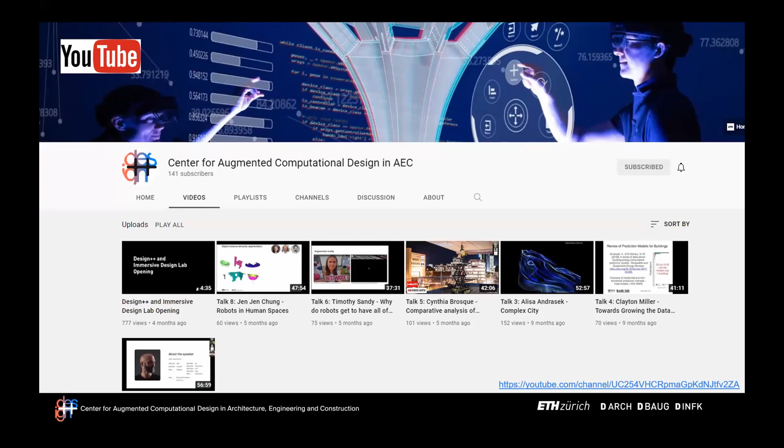At the moment, Design++ consists of a group of professorships from architecture, civil engineering, and computer sciences here at ETH Zurich. And for the running business, there is a team of 3 leading postdocs responsible for operating the immersive design lab, together with some research and teaching activities. A growing number of scientists and chairs and professorships is associated to us. So in case you're interested in the future of connecting AI, machine learning, and extended reality with the AEC industry, just reach out to us. We are more than happy to discuss further ideas or projects with you.

Having said that on the background of Design++ and the speaker series, now let me introduce to you our speakers of today, Professor Jens Schneider and Dr. Philipp Rosendahl, who are joining us from TU Darmstadt, as said before. I was informed that the third presenter, Mr. Costanzi, is unfortunately not available today. Professor Schneider currently holds the professorship for structural analysis, and since 2020, he is also Vice President for Industry Transfer and Internationalization at the Technical University of Darmstadt. Dr. Rosendahl is currently working as head of the Generative Design Lab at TU Darmstadt and is also co-founder of the startup company 2FI, which aims at improving skier safety in the backcountry for transferring scientific advances into practice.

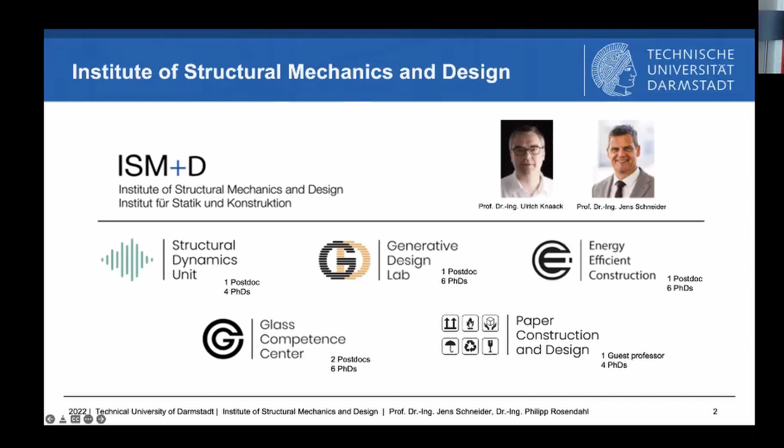And today, the most important group in today's talk, of course, is our Generative Design Lab. Philip is head of this Generative Design Lab, and we have other groups in structural dynamics, in energy efficient construction, in glass and in paper construction. And you see just from that slide that we have a little bit allocated the different topics to different postdocs and PhDs together with Uli Knaack, who is also part of the team, of course.

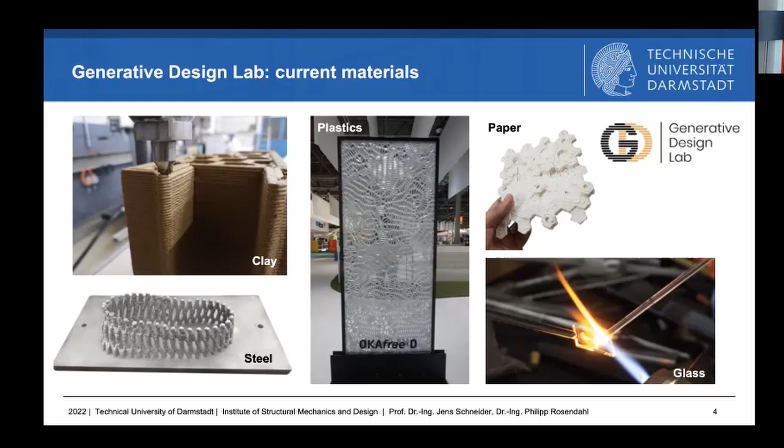Next slide, please. So we are working on clay, we are working on steel, we are working also on polymers or plastics in a certain context of the glass also, because glass always goes together with polymers in the end. And we are talking on paper and we are talking about glass. So in our group, like I explained before, we have dedicated the different groups a little bit to the topics I showed you.

We also prepared in the preparation of today's talk. I was really impressed also by your Design++ vision on the right hand side, where you have different aspects that are your goals and how you want to do it. And we try to circle around a little bit, Philip, if you just click. So we think that our today's talk has some links to structural ingenuity, to fabrication aware design, to innovative design, and to a certain extent also to acoustics. This is why I just wanted to briefly introduce that, so that you see where we are going today.

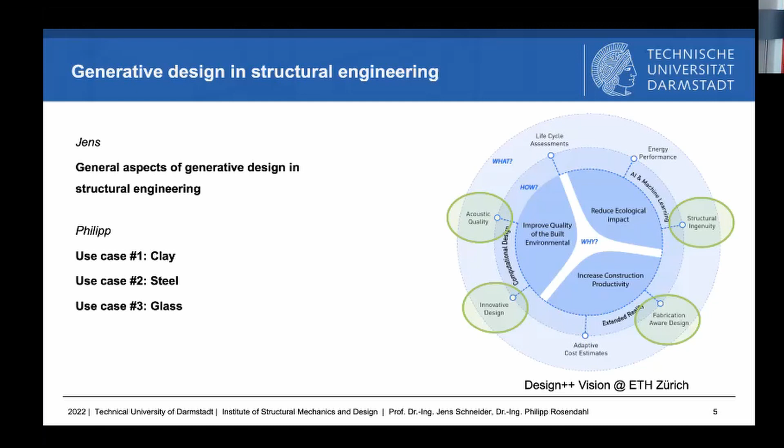And I start with the general aspects of generative design in structural engineering, and then Philip will go through the different materials. And we were thinking that after each of these different blocks, we can have a little discussion, because in the Zoom environment, with talks that are too long, in our experience, you get a little bit bored, and it's good to have some more interaction after a certain time. So the audience typically needs a little bit more change of methods within the talks. That's why we split it up into 4 different blocks, and I will start with the first one.

So first of all, I want to talk about scale. And I think this is important in civil engineering and architecture, because we are talking today about scale. We are working from the micrometer to the millimeter, the centimeter, decimeter to the meter, and also another scale we typically don't mention, but it's very often used. It's the hectometer, and then the kilometer. So you see that these scales already are a big difference, and I will come to that in the next few minutes. We have issues on imperfections and in the general aspects of generative design in structural engineering.

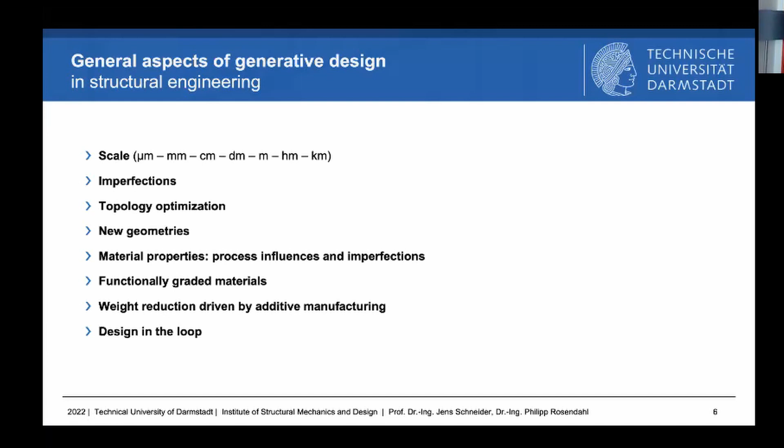Now also we have more chances in topology optimization. We can have new geometries. We can have different material properties that are influenced by the process itself and by the imperfections. We can introduce functionally graded materials. We can do weight reduction driven by additive manufacturing, and we have a new chance of design in the loop. In the next few slides, I want to just introduce this with one project where I was personally involved.

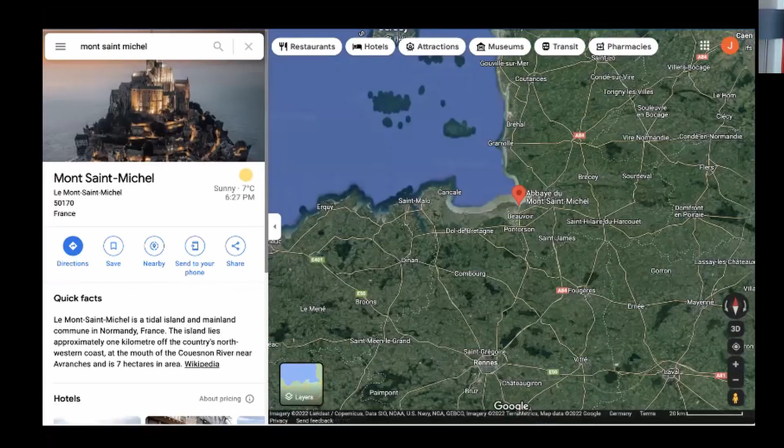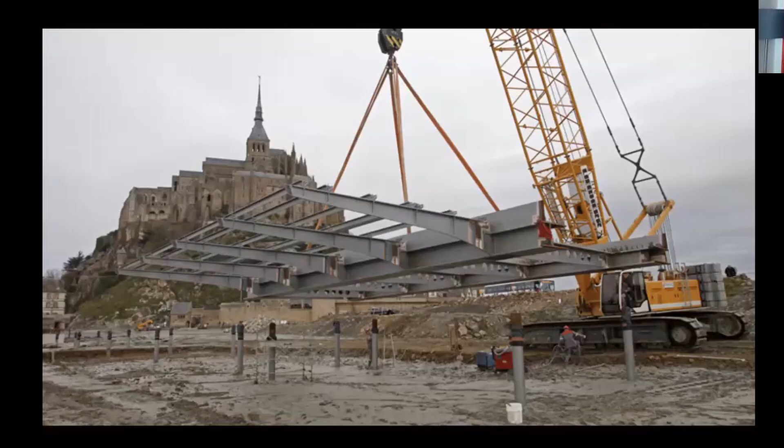And first of all, you might think, okay, this has nothing to do with generative design. It's true, but I want to show that the scale effect is something we have to consider when we are talking about generative design in structural engineering. You see, this is the Mont Saint-Michel, a little island in France next to the Normandy coast. And when we zoom in and zoom in more, I was personally involved in the design of that bridge. And you see that bridge already has a length of 800 meters. And this is, of course, something you will never print in one room. But the question is, in the next slide, how this bridge and parts of this bridge might, of course, be printed in the future.

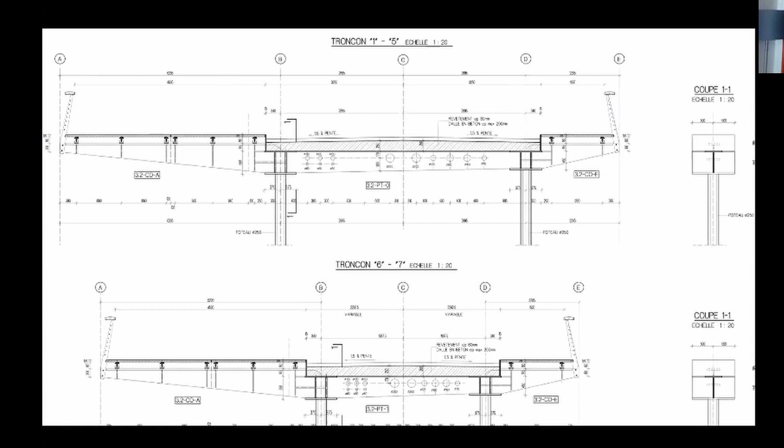But in the end, some of the parts, of course, might be printed in the future. And you see some of the parts here, especially when it comes to welding. Then suddenly we have a chance. And this is also one of the aspects we are talking about.

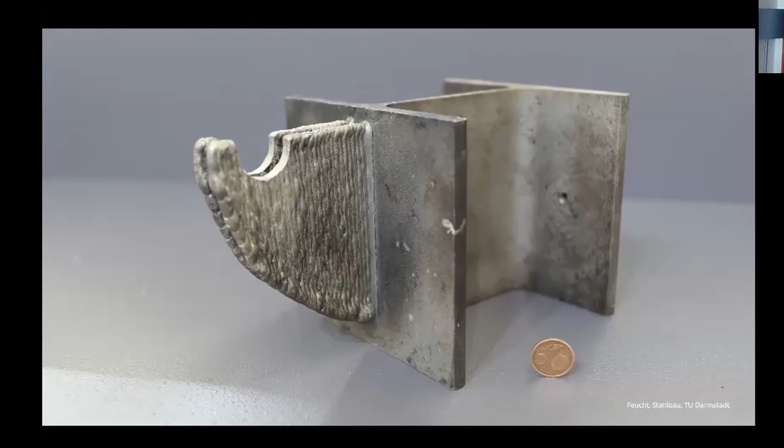For example, it seems very, very simple and kind of not really logical at first glance that we print such simple hooks. But in the end, if you consider that the element behind it, so the steel profile itself, very often is already arc welded, then in the arc welding that we can do, we can use the same process that already exists, and we don't have to do other process steps in between. This also already becomes relevant in the construction industry.

Next, please. Another example I want to give is a project where we did the structural design for the glass. You see that macro bionic sculpture, of course, is only because of aesthetics at that point. And this object is 17 years old now already. And if we look closer into the detailing of such a structure, next please, you see that when it comes to detailing on the left-hand side, when you have to connect the glass elements, like this insulating glass, to the supporting structure, which in this case was just a pre-stressed rod that you see in the left top picture where you have the little black square.

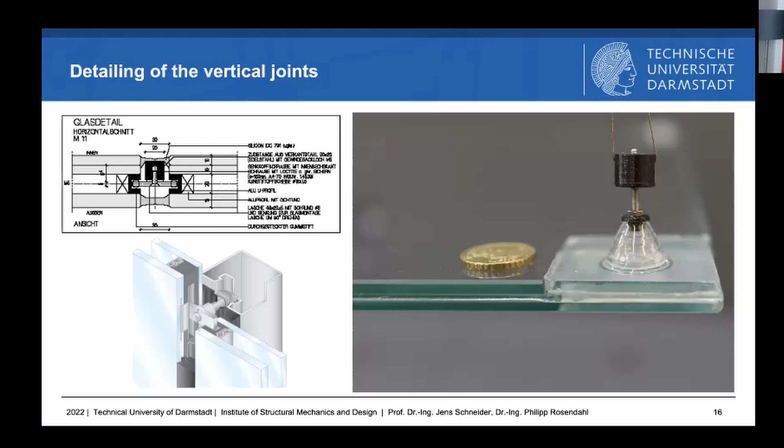So if you look at these connections, you can imagine that parts of this, of course, very often can be printed when it comes to individual design and not such very straightforward plane elements. For example, when it comes to curved elements already, this is an issue.

Another issue we have to consider in the civil engineering world is, of course, imperfections. So we have material imperfections, like on the top left, where we see this nickel sulfide inclusion in the glass, which has only a very small size, but when it comes to phase change, it will break the glass from inside. So this is a big issue. And on the other hand, we have the issue that our ideal geometry from CAD, when it's printed, doesn't really appear to be exactly the same.

Also, you see on the right-hand side an example from Chris Borg, when he did the steel printing, we have some issues sometimes. And this has to be considered. And this, of course, also is a problem, because the big issue is then how can we assure a certain quality and how can we guarantee that quality? Because in civil engineering, we're typically talking about 25 to 50 to 100 years of lifetime. And this is also something which is different than in other disciplines. And this is why I think it's important.

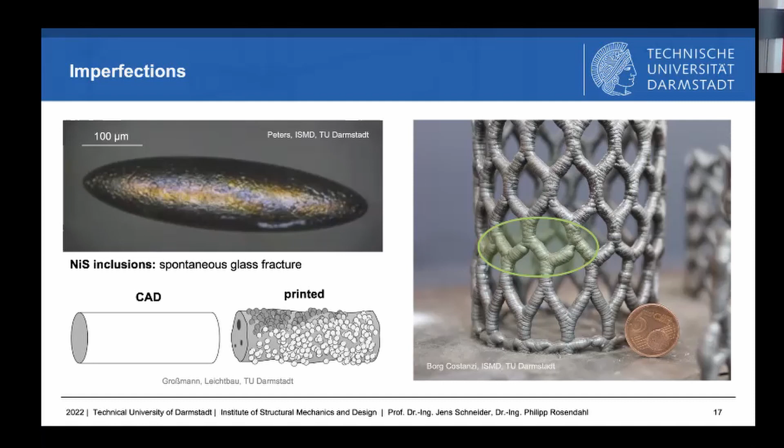Next slide, please. Of course, additive manufacturing enables topology optimization in a way that we could not envisage some 20, 30 years ago. On the right-hand side, for example, if you again have that little element from a machine, you see the original, then a milled and then a printed example. There's a lot of room for weight reduction and material reduction, which supports sustainability in the end. And I think here is a big chance that we can have these technologies introduced in the built environment much more, because of the very efficient use of the material. I think this is something that we couldn't do without additive manufacturing.

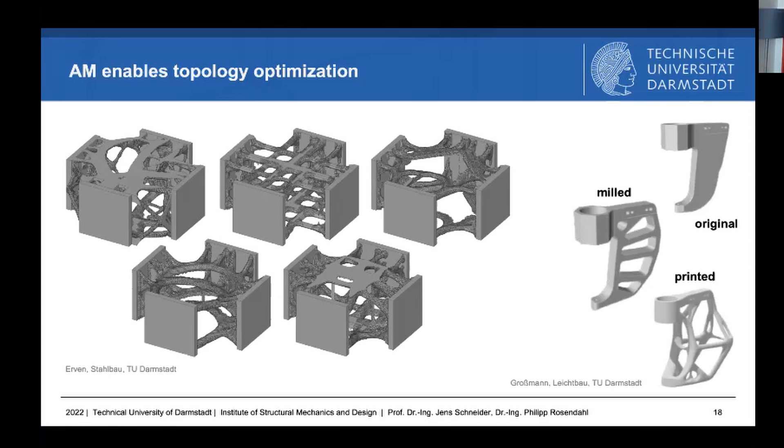Next, please. Of course, it also enables new geometries. And I think this is one of the key reasons why AM is seen to be a future thing, that we can do something that we couldn't before because it was just too complex. If you see, for example, on the right-hand side, those little dice that consist of a framework, just struts and ties, but in that very small size, which can be used to fill a volume.

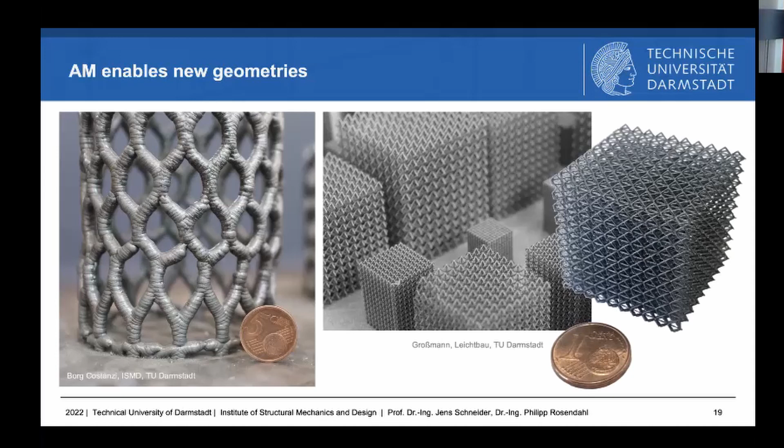Something like this, for example, is used already in cars from Porsche. And you see that there are many opportunities, of course, to have weight reduction through that new technology, and we can use that also more in the civil environment.

Next, please. Of course, the process dependence of material properties is a big issue, because you see on the left-hand side, for example, here the printing that was done was with a contour hatch mix, where you try to have the laser in the powder bed only moved horizontally, and then you see that you have certain issues with the final form here. And if you go for the hatch only, you see it looks even worse. And if you go for the contour only here, it's a much better result.

So the question how you do the printing has a big impact in the end on the structural integrity and the imperfections, and in the end, of course, also the material properties. This is also shown on the right-hand side in the wire arc additive manufacturing that is done here by Chris. You see different ways to do the individual points, and then suddenly you have different material properties, of course. And this also leads to other problems. Next, please.

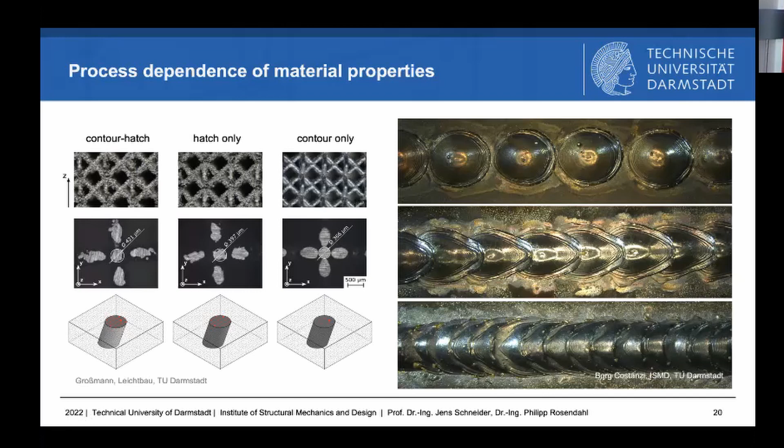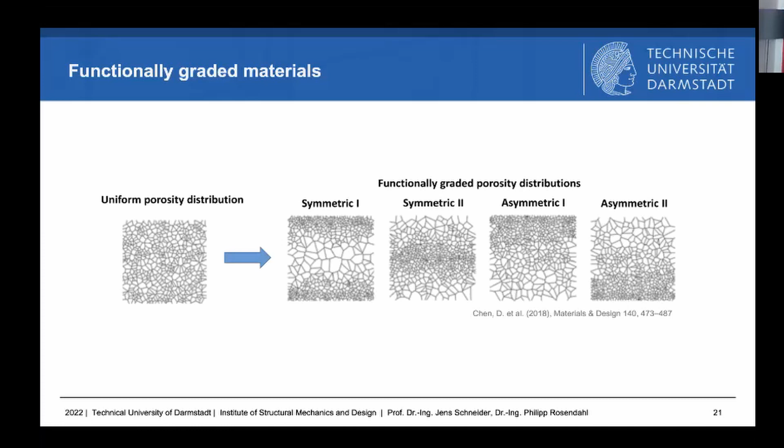That we can, let's say, turn around, because we have the possibility now to use the different ways of the printing also to have functionally graded materials, where we have different ways to have such foam type structures being functionally graded. And this is also a big benefit in the future that can be used more to be able to react to certain loads on a structure.

And I think there's more room also finally for design in the loop, so that using the technologies from today's photogrammetry, we can have the as-built system that is already existing, for example, on an existing structure, scanned, and then the data transferred, and then the robot itself prints exactly where you need it and to the size you need it.

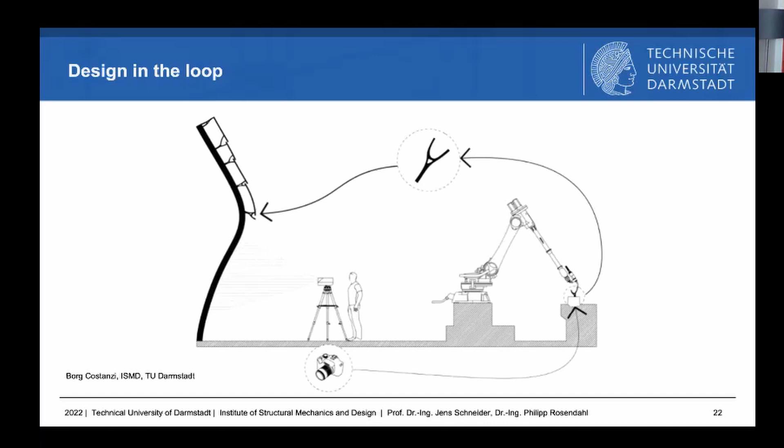And this design in the loop, in the end, is something I think can really change the whole built environment, especially for the existing buildings and the retrofit, where you don't get some parts and you otherwise have to mill them very intensively, and this is a lot of effort. So I think the design in the loop can really be a good game changer in the future. So this is just a brief introduction of some of the issues from our perspective in the built environment.

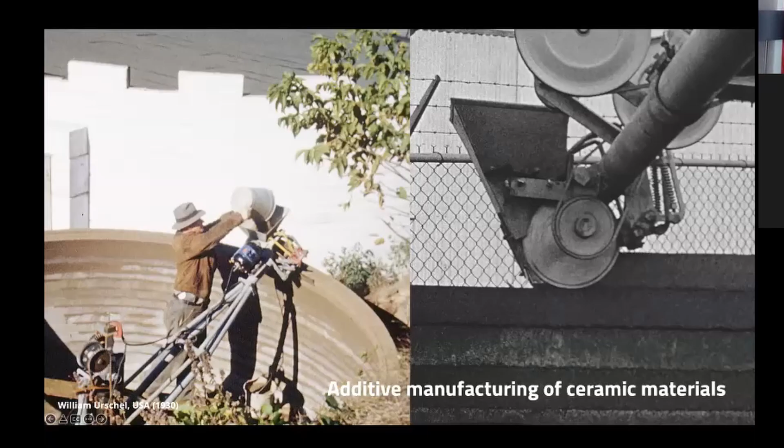So let's talk about clay and the additive manufacturing of clay. The particular example that I want to show today is a so-called nesting brick. Ceramic materials, you may know, are among the oldest building materials that mankind has used. And even additive manufacturing is older than one might think. The pictures that I'm showing here are from the 1930s, where William Urschel had already patented his machine for building walls. This machine is, of course, much simpler, yet remarkably close to today's concrete extruders. And even back then, he built entire houses with this semi-automated process.

Now, talking about clay, about 30% of newly constructed residential buildings, at least in Germany, are brickwork, and the customary extrusion process yields relatively cheap products, but of course they're uniform. So anything customized is a labor-intense process and hence rather expensive. And that's where a customization-driven demand for additive technologies comes into play.

To give a brief overview of the state of the art of clay 3D printing, I want to show this. It's actually only a part of this table from a review article that my colleague Alexander Wolf has compiled, and he collected all these different projects that have been done with 3D printed clay. And you see different kinds of applications. There are shading systems shown here, for example. We have heat exchange pipes. We have projects that are solely for architectural purposes, but also coral habitats for life forms.

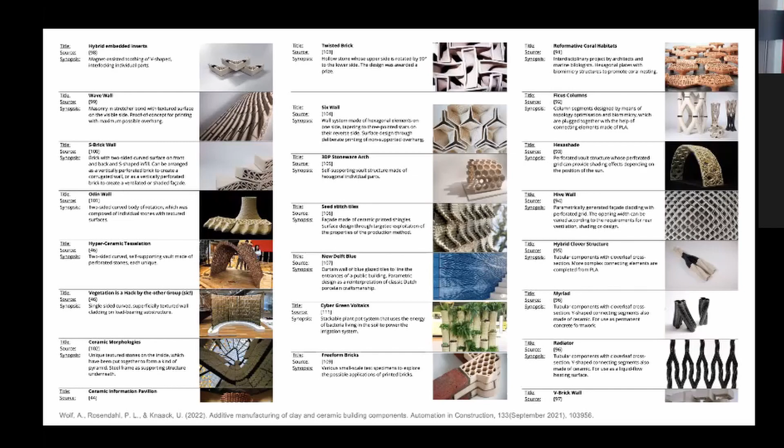Now, a special application of printed ceramics, and that's what I wanted to discuss today, originates from the following motivation. Construction measures very often cause some kind of habitat loss for birds or for bats or other species. And as a result, authorities often require some form of compensation for this habitat loss. Of course, we can do this in the form of nesting facilities for birds, for instance.

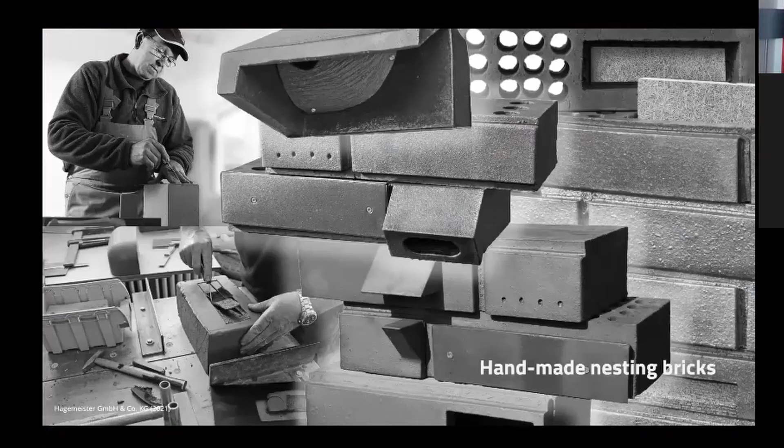However, these exterior nesting boxes, as shown here, are really visually impairing the appearance of the facade. And that's why they're equally unpopular with the building owners and with the inhabitants. A solution to this can then be a so-called nesting brick. A nesting brick looks like a customary brick and can be included into the facade, but it has openings for birds to enter the brick and to nest inside.

And this example that I'm showing here is from a German manufacturer, Hagemeister. They're producing these kinds of bricks completely manually. You see they start with a green product, and then carve out the cavity, screw front parts onto it and everything. It's slow. The process has a yield of less than 100 units per year.

And even worse for this kind of manufacturer is that the next generation of trained ceramic technicians that they would need to continue the fabrication of these pieces is nowhere to be found. So they have a massive shortage of skilled labor. And that's exactly where additive manufacturing can address a number of pain points. One, it of course holds the potential to drastically increase the yield of this kind of product, and it can address the shortage of skilled labor that is needed in this case.

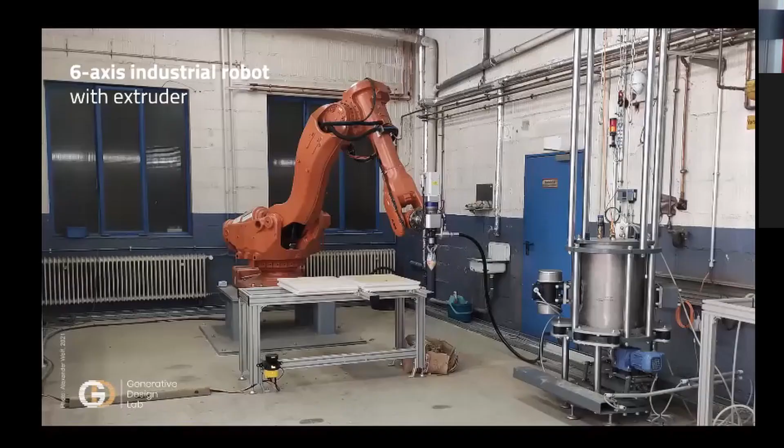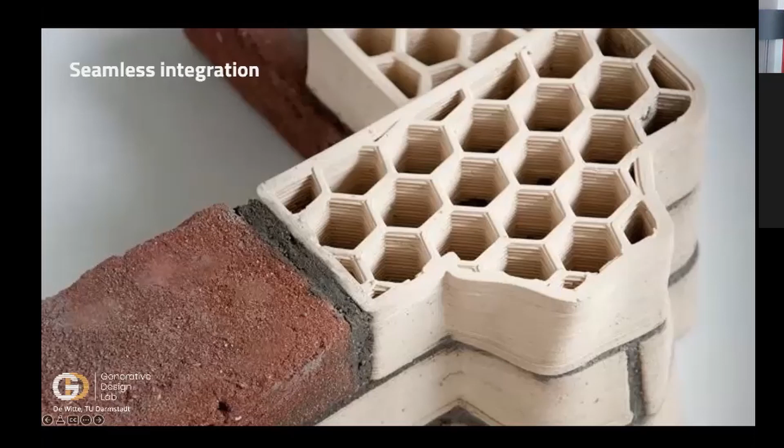Now, how do we do this at the Generative Design Lab at TU Darmstadt? In our case, we use a 6-axis industrial robot that is equipped with an extruder head. And with this setup, we have experimented with different kinds of printed bricks. For instance, here, we experimented with functionalized bricks that seamlessly integrate into traditional brickwork facades. And this example explores a free-form outer contour and a custom infill pattern in this case.

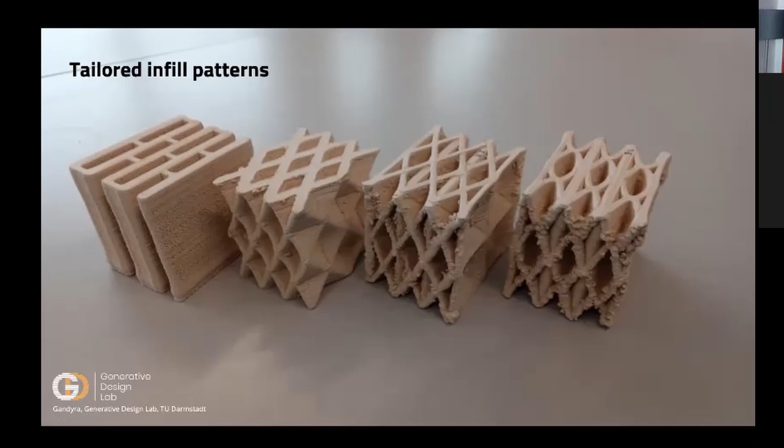Jens promised that we touch the aspect of acoustics. This is an example of the acoustic experimentation. So we have the typical extruded shape of a brick, and then we experimented with different kinds of patterns to see how that changes the acoustic and the thermal performance of these bricks.

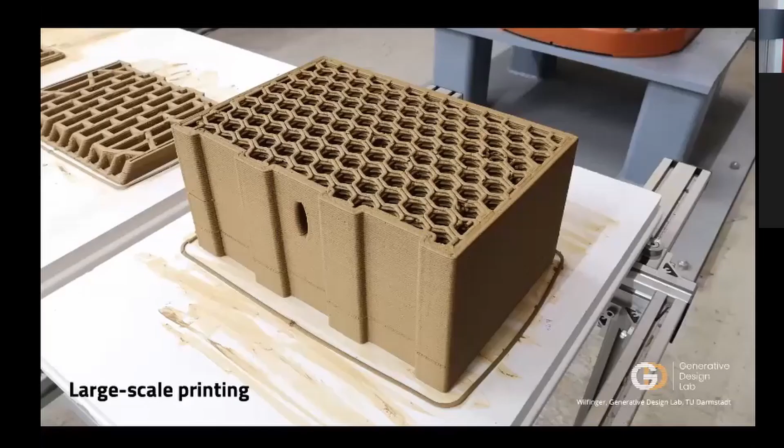In this example, we've experimented with the scales that we're capable of printing. And you can already see this little entrance that we've printed here, a hole in the wall of the brick that will, of course, be needed for the bird to enter the brick. And the challenging part here is that we have to print overhanging parts. A hole always requires a ceiling, a roof, or something. And in this case, it already worked quite well.

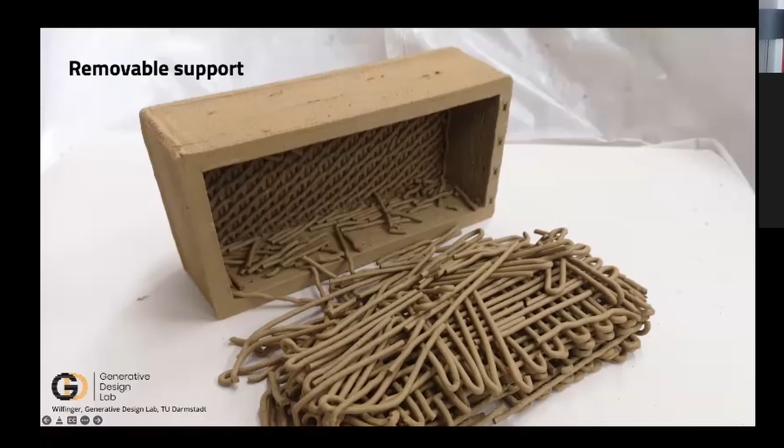Even more challenging is the printing of cavities, because obviously printing into the air with no support is a problem for all kinds of 3D printing processes. And for this clay printing process, our solution was using disconnected support material that after the printing process can just be removed easily. You can break it off the brick with your hand, and that way we're capable of printing cavities.

And with these two examples, that's basically the ingredients that we will need to semi-automate or fully automate the production of nesting bricks, and then in the future provide products that seamlessly integrate into existing facades or newly built facades and provide habitat for birds and bats. And with this little example, I would like to open this block for the discussion.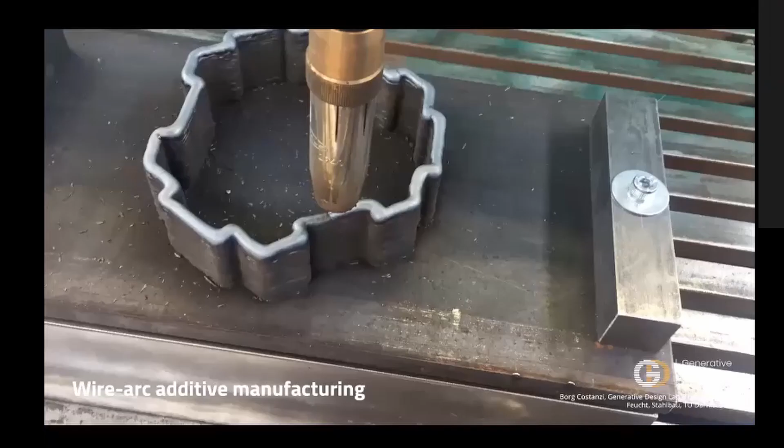And let's talk about steel printing. And in this case, my focus will be on mass customization and, of course, often in metals, lightweight design. So for steel printing at scales that are relevant for civil engineering, we use wire arc additive manufacturing at TU Darmstadt. And this process basically employs conventional welding equipment and uses the deposited weld material to build up structures additively.

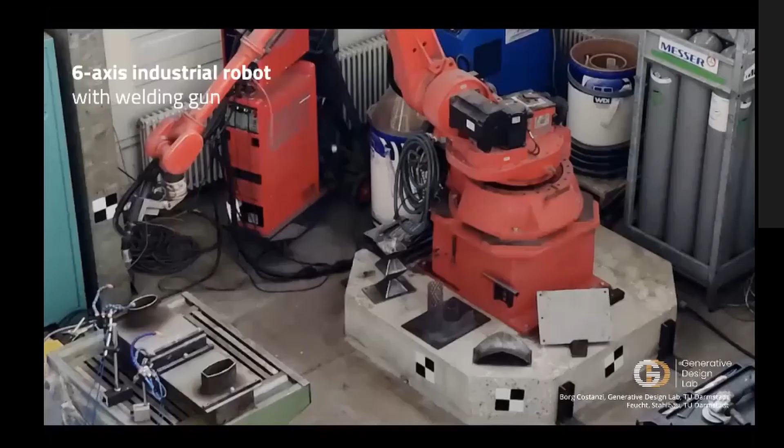A big plus of this technology is that it can feature deposition rates of up to 10 kilograms of material per hour. And it's open to a wide range of materials, not just steel that we're using, but also aluminum, titanium, you name it. The material is deposited either continuously, as shown here, or point-wise, as we will see in a later example. The setup that we use at TU Darmstadt is again a 6-axis industrial robot, and it's equipped with a welding gun. In this picture, you actually see some of the samples that we print in the lab.

Now, how can we use it in civil engineering? And I promised that we might come back to the example that we've seen in the first part of this talk, the design in the loop. Here, wire arc additive manufacturing enables mass customization. So imagine you have a substructure that has certain imperfections, maybe even a complex geometry, as shown here. And this will make mounting facade elements, facade panels, as shown on the left, quite challenging because we have to compensate for dislocations, for misalignments. So it's going to be quite labor intense.

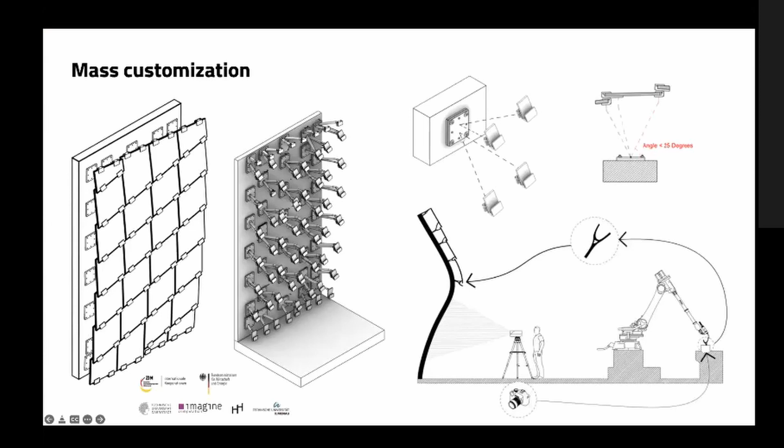With a fully digital process, we can simplify the assembly significantly. So we can scan the substructure as illustrated here. Then compare the substructure to a digital model, have a digital process that designs the missing pieces between the supposed location of the connector plates for the facade panels and the substructure. It has to obey certain restrictions. For instance, we don't want to print angles deeper than 25 degrees. Then we print this part on site and assemble directly. We've actually done this as a demonstrator project. I've already skipped to this slide.

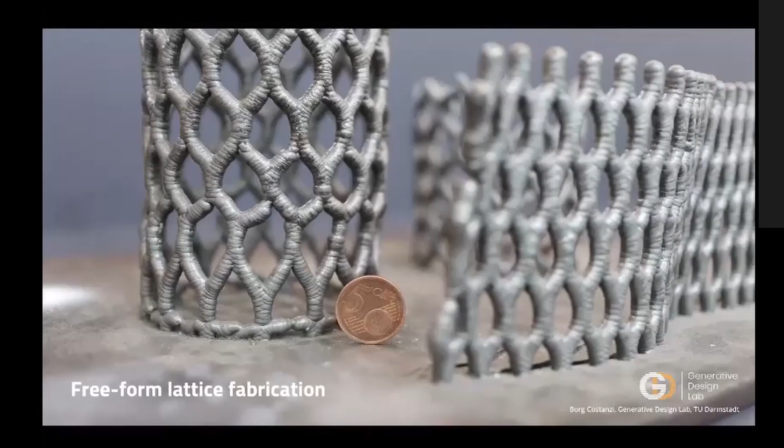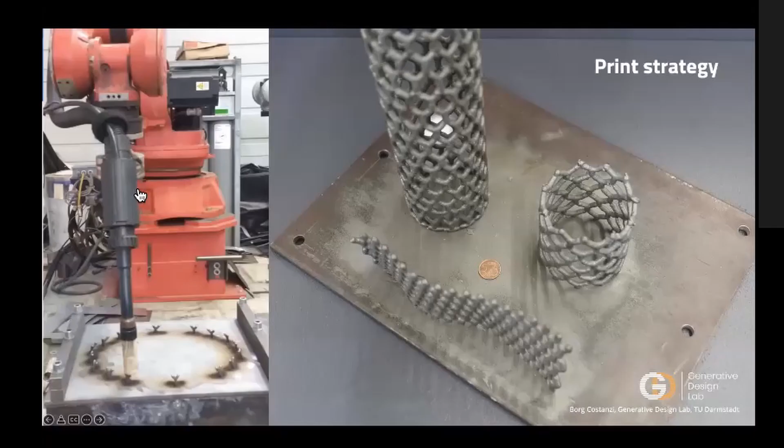If you want lightweight structures and not something that's process optimized, but rather mass optimized, then we have to think, in my opinion, lattice structures. And here we would basically harness the unique capabilities that additive manufacturing offers in terms of manufacturing structures that are not accessible with customary or subtractive manufacturing techniques. In this case, this is what I've talked about before. The printing process is discontinuous. So you see the remains of individual dots that we've printed here, and this is nicely illustrated in the video. And notice how we also go discontinuous in different points, and the printer jumps from point to point, and that's because of the thermal management.

Again, that's very vital in 3D printing, in additive manufacturing, that we always have to optimize our process for the structural quality. And in wire arc additive manufacturing, the thermal management is one of the most important aspects that we have to consider to allow for enough heat to dissipate from the structure before we add the next printing point, to avoid thermal deformation and eigenstresses and so on.

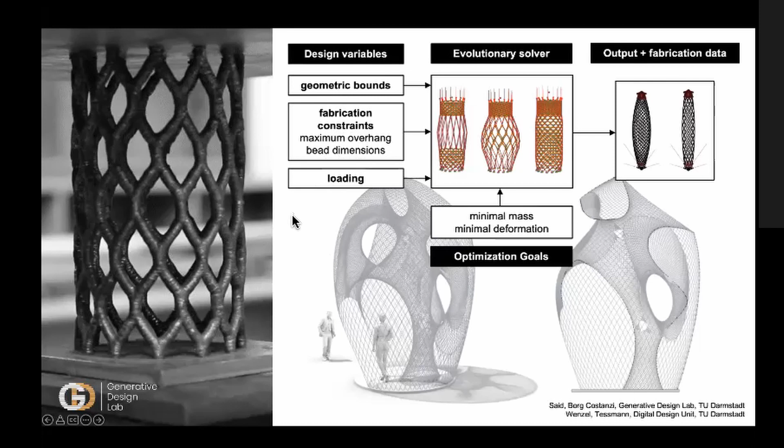Designing lightweight structures then requires particularly advanced digital parametric processes. An example is shown here, for instance, to fabricate these lattice-based pavilions that are rendered down here. We optimize the structural design using a fabrication-aware evolutionary optimization algorithm. This solver is fed with the geometric boundaries, the fabrication constraints such as maximum overhangs or the dimensions of the beads that we're able to print, of course with the loading conditions, and is then given our optimization goals such as minimal mass and maximum stiffness. And then we get an output geometry, print this, and can actually put it to the test.

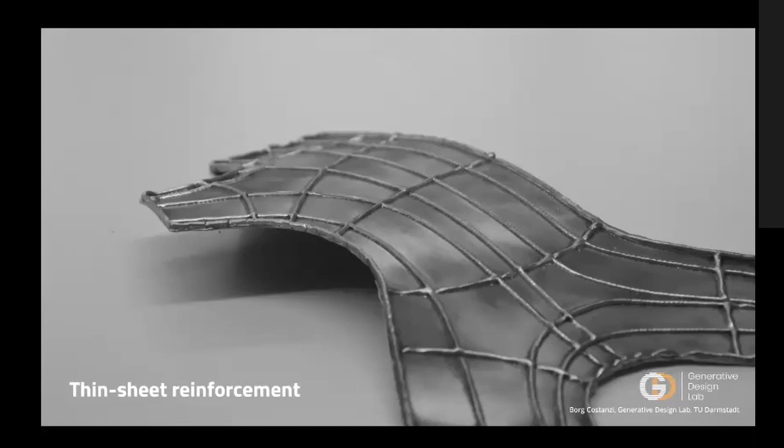Wire arc additive manufacturing can also be used for the reinforcement of existing steel structures by just welding on top of them. And in our case, we examined the particular case for the reinforcement of very thin sheets. So here we elastically deform sheets as shown on top, and then print on the deformed shape. We print stiffeners on top of the deformed shapes to freeze the deformed shape and produce relatively stiff, very lightweight, and free-form, if you will, facade panels, for instance, because we can generate any kind of geometry that we like with the elastic deformation process.

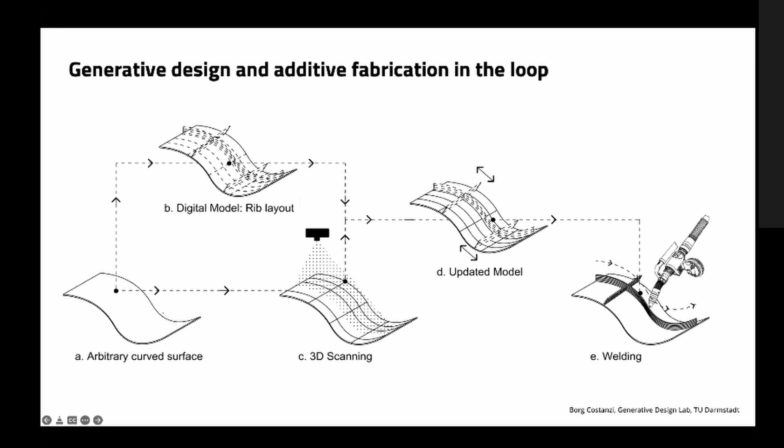Of course, this holds many challenges for engineers. For instance, printing on a curved shape requires the 3D scanning of a shape. We also need a rib layout that is optimized for maximum stiffness, for maximum strength, whatever our goal might be. And this needs to be brought together to an updated model that has the reinforcement on top, and only then we can start the welding process.

And also welding onto thin sheets is an extremely challenging process because, as I said earlier, with this wire arc additive manufacturing process, the thermal management is an issue. So instead of printing a continuous line, as shown in this picture, we might want to break up the lines that we're printing into individual segments, print 1, print 2, print 3, and then 4 and 5 to connect it and to allow for the heat that we bring into the sample to dissipate.

Similar with ribs that we print in different locations, we have to break up the structure that we add on top into individual pieces in order to allow for the heat to dissipate.

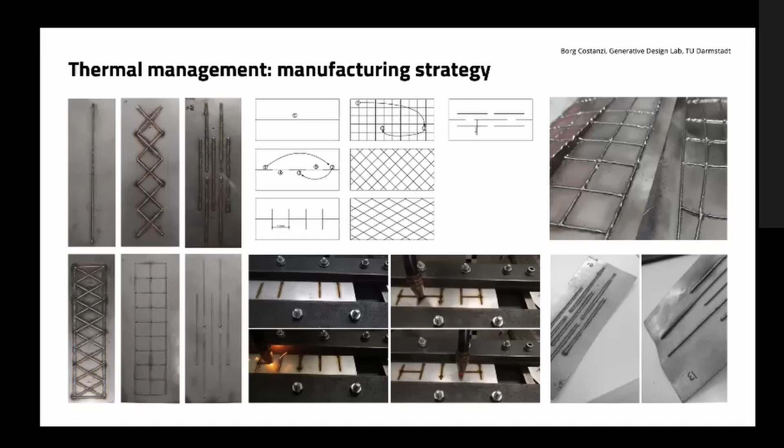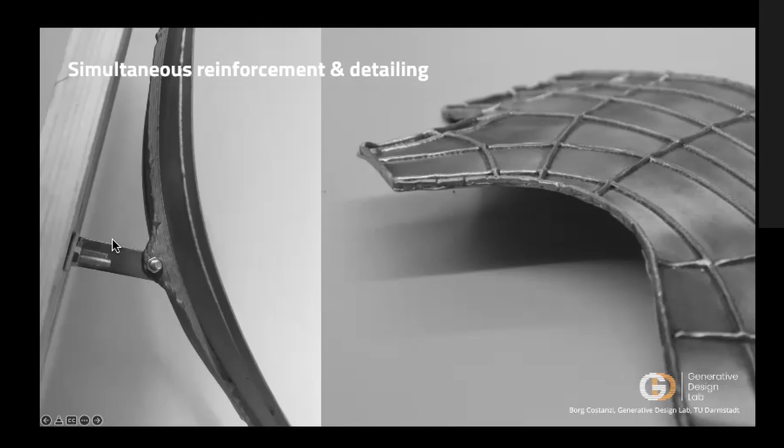Big advantage of this kind of process is, though, that we not only add our stiffeners, but the detailing comes for free. We can add the connection points to the substructure, printed on top, just like a bolted connection as shown here. So we might think that we even print the entire connection to the substructure in one process. And again, this I'd like to discuss with you.

Then the final stage of the presentation will be in the use case of 3D printed glass. And here our goal is the achievement of stronger structures. Additive manufacturing with glass, this is our vision. These are just renderings of where we would like to end up. In this case, you see a console for stairs to connect transparent glass stairs with a transparent handrail and have the connection completely transparent. On the right-hand side, you see a glass facade where the different glass panels need connectors.

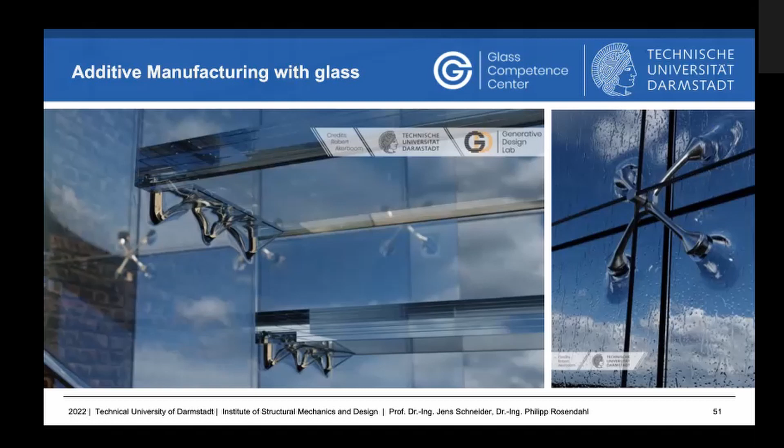And in order to make these connectors structurally powerful and very strong, we'd like to avoid the typical drilling through the glass that is necessary, or the addition of adhesives on top of the glass surface for the connection, because every subtractive processing step that you do with the glass introduces micro cracks that weaken the overall effective strength of the structure, and 3D printing could really reduce the subtractive operation steps on glass. Here too, let's have a brief look at the state of the art.

There are quite some activities on the 3D printing of glass, more than you'd maybe expect. There are companies like Micron3DP and Swarovski. The MIT has printed a bit larger scale samples. At ETH Zurich, there are activities. Laserzentrum Hannover prints on a laser-based process. The NeptunLab of KIT and the Uni Freiburg, they have a process. QSIL is a German company, and TU Ilmenau also uses a laser-based process.

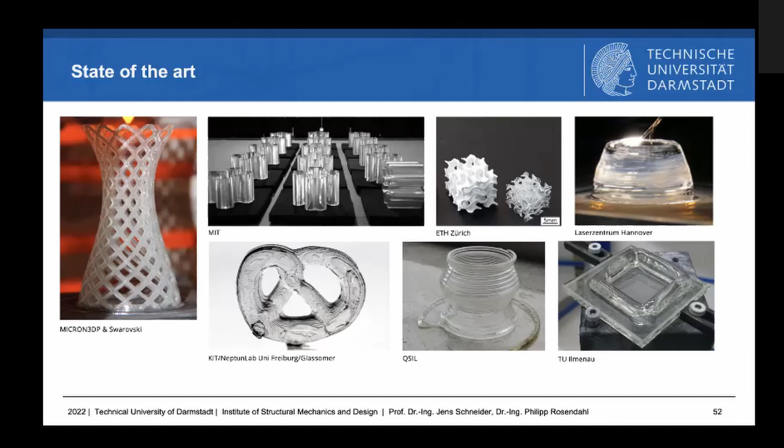What's common to most of these samples, MIT maybe goes a bit bigger than everyone else, but mostly these samples are very small, and in particular the ETH structures here, they're extremely fine and very delicate. Now we are in civil engineering, so we would like to translate this to larger scale, something that's applicable to buildings and to the huge glass panes that we use nowadays. And that's where we're going at TU Darmstadt.

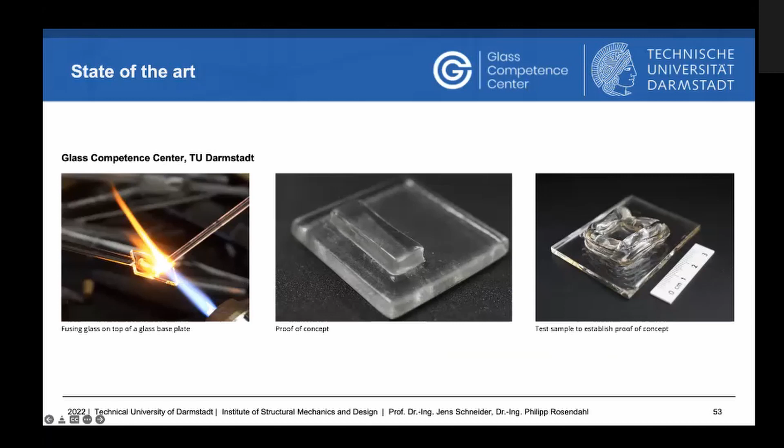We've started very, very small. Of course, as everyone else, we've basically started with a handmade process and melted a rod onto a glass pane. Looked like this, or like this, I think is even a bit earlier. Not very delicate structures, but they are proofs of concept that you can put to a test. You can investigate the residual stresses in the connection between the melt-on and the glass pane that is shown below. This is done with photoelasticity methods.

We've analyzed the chemical compounds in the transition zone between added structure and the glass pane. We've looked at cracking and how cracks might travel through or along the interfaces of printed structures. And this result is actually really promising, you basically only see how we broke glass, but it shows that this crack, for instance, traveled across the interface, and this one too, and not along the interface, which means that we have a very good connection between the added structure and the base plate.

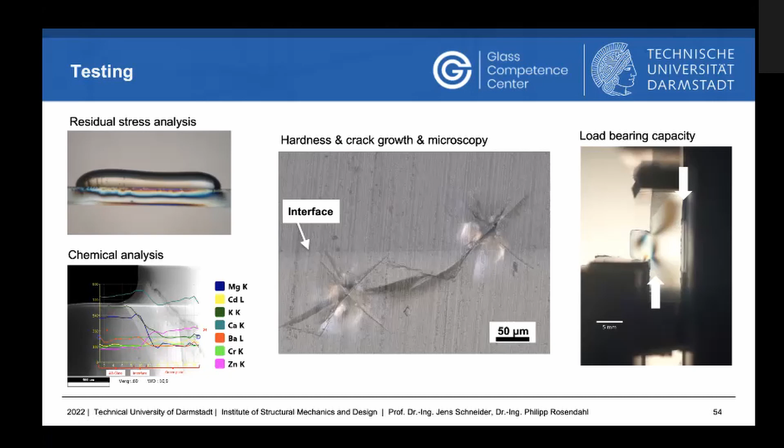And we've even put this to some load-bearing tests and done this with photoelasticity again to visualize the stress concentrations here. So these are very basic tests, and this gave rise to the motivation to actually print a larger scale 3D printer. It's under construction right now.

Unfortunately, I can't show printed samples, but the basic structure is that we have a cavity in the top of the printer that will melt the glass, will extrude it through a nozzle, and then have a heated chamber. This is the heated chamber. You can see it on this side too, where we can control the temperature on the base plate that we're printing on to have a connection at the desired temperature between the melt and the base plate, and of course a motion unit that translates and rotates our sample.

With this printer, we're hoping to print large-scale structures. Large scale in this case would mean, I think it's 500 millimeters by 500 millimeters and something like 200 or 300 in height of printable dimensions, and printable onto a glass base plate. That's the unique feature where we think glass 3D printing offers a big potential, by connecting different glass pieces.

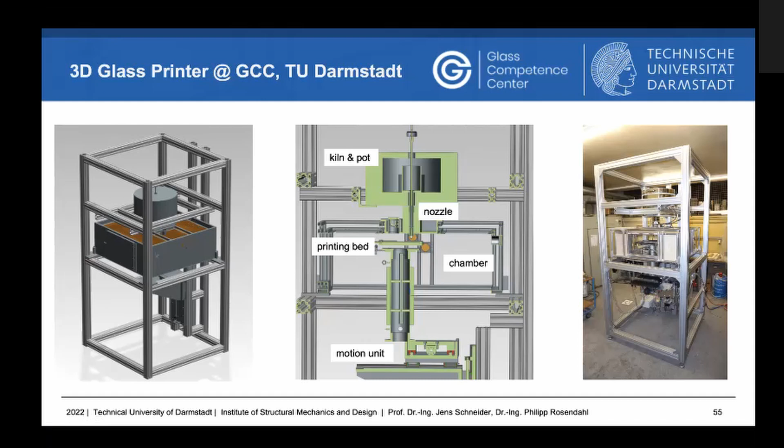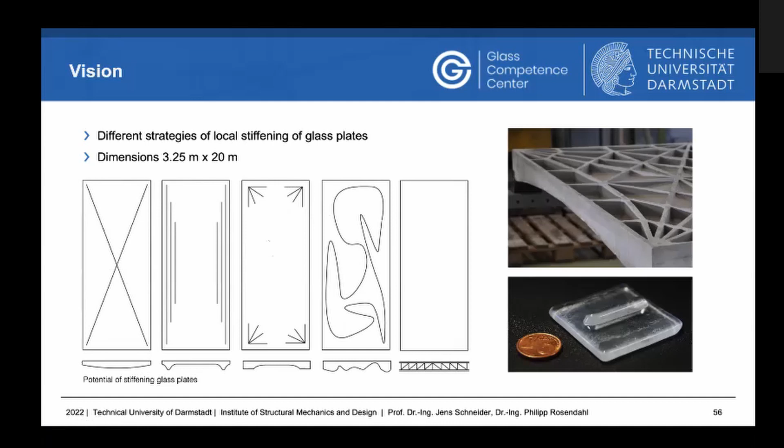And then again, what we're thinking about doing with this, similar to the stiffened metal sheets that I've shown before. And here is where we maybe get back to the bird-aware design, that birds might see the glass structure, is by printing on a glass plate either stiffeners in these kinds of layouts and shapes, maybe something artistic in a free-form pattern that makes a very large glass pane more visible, for instance, to birds, or to do something like done here in concrete, to reinforce it with the stress trajectories and just stiffen out the plate massively.

Different designs that we were thinking about for how to connect glass plates with each other. On the left-hand side, you see the conventional connectors, which are either glued on top or drilled through the first glass pane in case of a laminated glass and then connected to it. This is where printed glass might offer different options, where, for instance, the load can be transferred in the actual direction that it is going, and we have less bending. That means less loading on the glass connections here.

When we want to stiffen out glass plates, this is the traditional way we're going. We're just adding more layers of a laminate. With printed glass, we can follow the stress trajectories or just be smarter about where we add our material to stiffen out. Then we have insulating glass units, in particular vacuum insulating glass, where a big challenge is the edge connection of the different glass panels. Here we could harness our printing process basically as a welding process, or even in bigger constructions where we need a spacer and a sealant, we could print around the corner and then have much less sealant needed here.

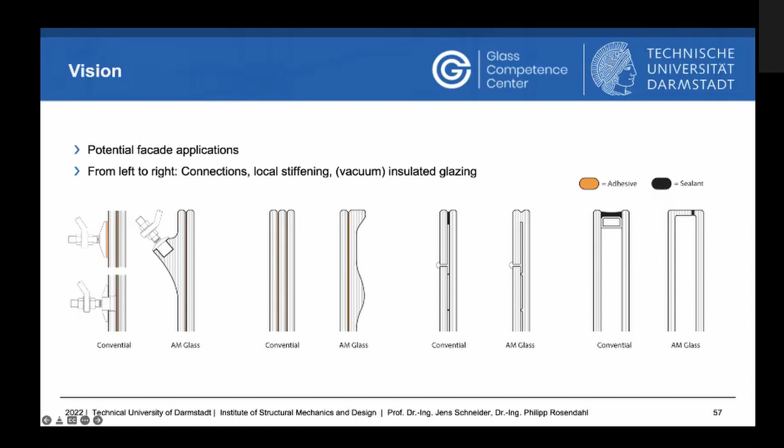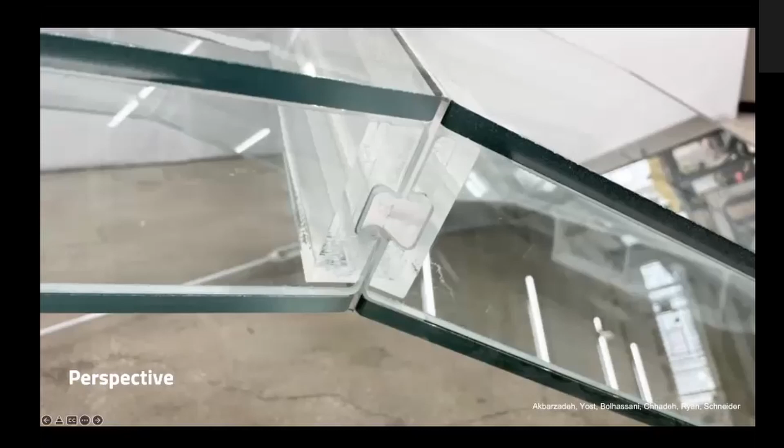One example where we could see it very practically applied is this glass bridge that was recently built at the University of Pennsylvania with colleagues, from hollow glass units. You see the scale of the bridge, someone's walking past here. And in these bridges, we have these kinds of insets, these connectors that connect the different hollow glass units. And if in the future we could print elements like this and make a more direct connection here, we might actually enable glass to be used as structural elements and for people to walk over.